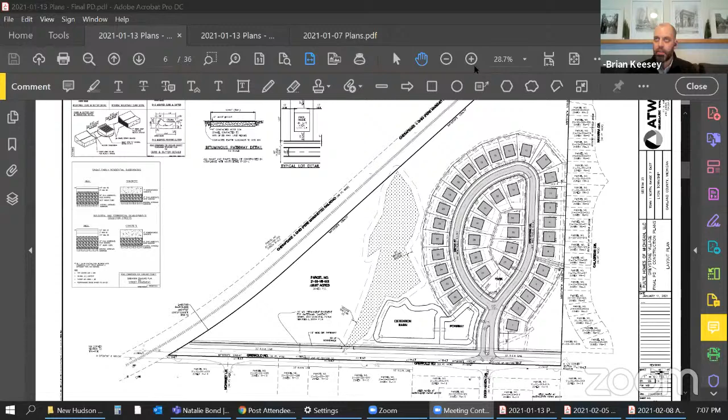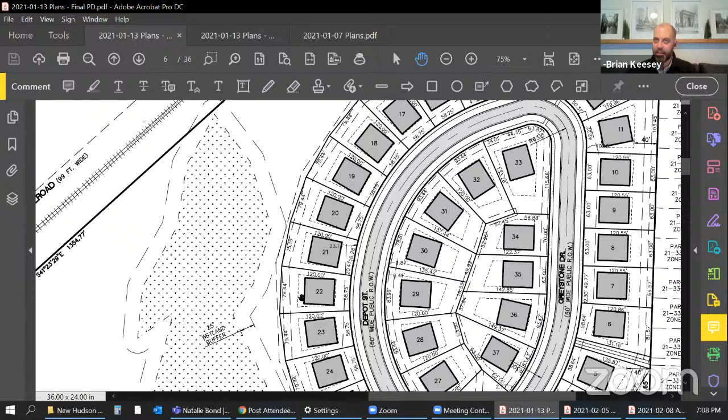Another item requested during the preliminary review was an impact assessment on how decks, patios, or hot tubs would fit within the building envelope. We think that should still be provided. The plans note the building envelope and an anticipated building footprint in concept, but there are instances where an easement is located behind the anticipated footprint, and it's not clear where a resident could or could not build a deck. We think that information should be illustrated, at least in concept, so we don't have unhappy residents who purchase a lot, build a home, and then find out they can't put a deck on the back. That's one thing we think needs to be cleared up.

Final comment from the preliminary phase: there was a contribution agreed upon for $15,000 to the township's 11-mile park fund. We think it's wise to broaden the scope of where that contribution could be applied and instead direct it to the township's overall park fund.

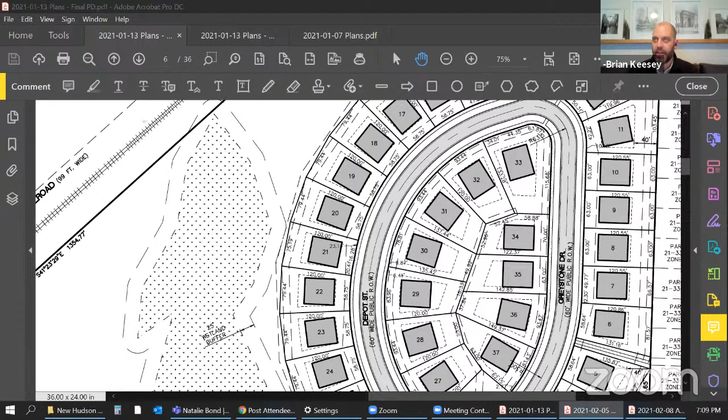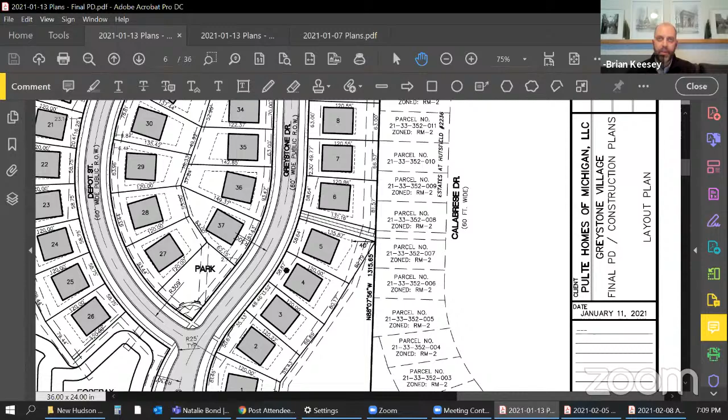In addition to those elements, there are a couple of things I think are important to highlight. There is a stormwater easement in the Estates of Hutsfield, south of Unit 5 and Unit 6 on the Greystone project, and the applicants are proposing a sidewalk there. But because this is a stormwater easement on the other side, it's likely never to be built or constructed as a sidewalk in that area. We feel this portion of the sidewalk in the Greystone project is unnecessary and won't go anywhere, and could be deleted.

The other note in our review is something I've employed in other communities where there's potential for pedestrian and railroad conflict. I have an example in our review letter in terms of a zigzag of fences, if you will.

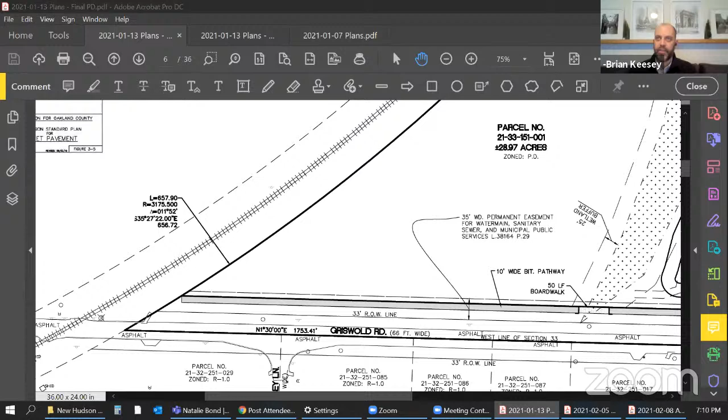I'll put that up on the screen for those who may not remember. Essentially our goal here... sorry, running into a slow computer, I apologize.

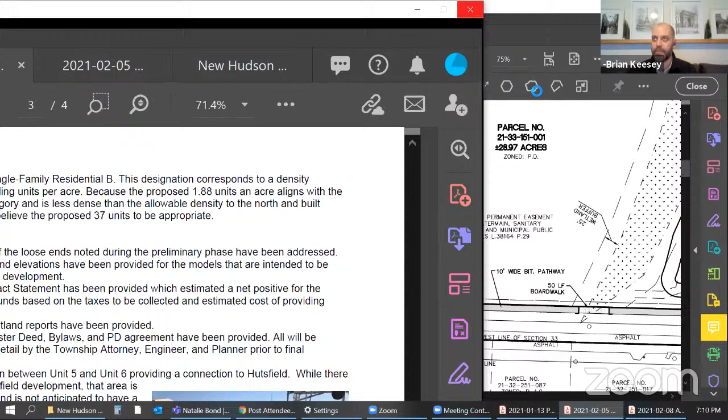Essentially our goal is to signal to pedestrians that they are indeed crossing a railroad track. I know that seems self-evident in some instances, but there have been cases where pedestrians on a bike with earphones on don't hear that a train is coming, and that could potentially lead to a catastrophic event there.

So we think a relatively low cost and easy to install mechanism would be something like this, where a pedestrian is forced to navigate a system of fences to alert them to the railroad crossing. I really apologize, I don't know what's going on with the computer here. I'm going to stop sharing.

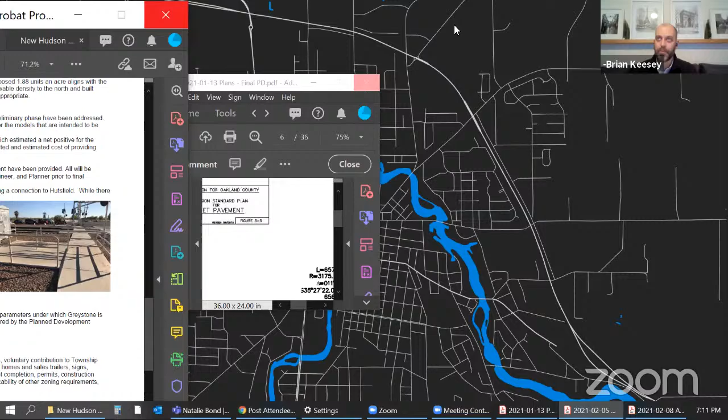In terms of those elements I've discussed, I think the project is in good shape. The plan development agreement Carol has been working on, and Leslie has been working on as well - I owe a few comments, but in terms of all the documentation required by the ordinance, it has been provided in at least draft format, and I think it's in good shape. So based on all that information, there are a couple minor items to clean up, but other than those, we are recommending approval of the final PD.

I'll take any questions anybody might have. The applicants, Brian and Leslie, are here. Any questions for Brian? No, no.

Brian, I have one question on what I'll call the pedestrian speed bump by the railroad tracks - is that something that would be on both the north and south side of the tracks? I think if it's something we're interested in, the township could either build it itself in the future, or we could ask that of another applicant if that comes down the line. It certainly wouldn't be something we'd require as part of this development since it's off-site.

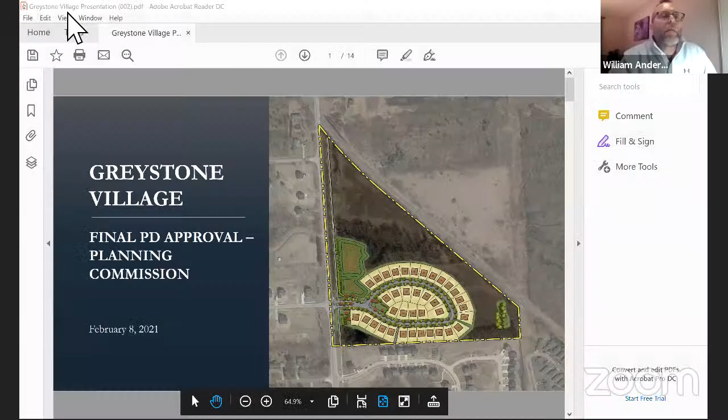Okay, thanks, Bill. Do you have a presentation for us? Yeah, sure. I'll try to be brief, but it's been a while, so I figured I can share the screen. Everybody see that? Yes. Yes.

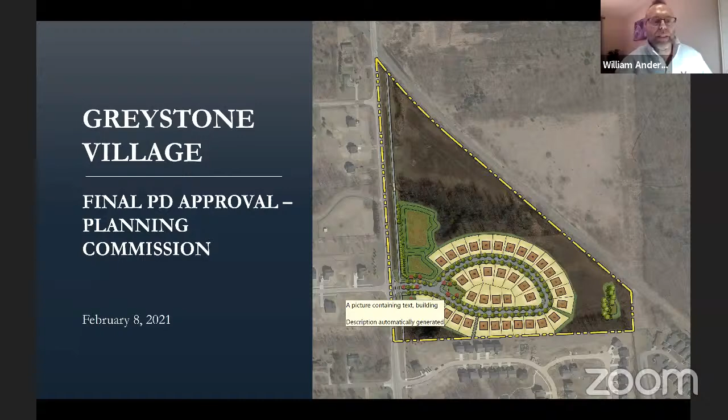Good evening. First, it's been a while. I haven't been to Lyon for a while. It's nice to see everybody, and Happy New Year and all that good stuff. And this project's been around a while. I've been involved now with Pulte at this final PD approval stage. So we're here tonight and glad to see everybody.

So just kind of go through our development team again. Pulte Homes wasn't the original applicant, but they're the land developer and the home builder on the project. So that's going to be our development team.

Just a little bit on the time frame. As I said, this was eligible since it's less than 40 acres. So it got eligible in the fall of '17. And the preliminary PD zoning approval was approved in September of 2018, with 37 single family detached units. It was zoned PD from the original light industrial. As Brian, the planner, said in his letter, very little has changed since then, the plans you see today. And we submitted our final PD plans that you're looking at tonight on January 11th.

So Griswold's a county road, 2-lane road. This is kind of just the area. We're vacant land to the north of us. To the east, we got the railroad tracks, it's Chesapeake & Ohio Railroad, mostly vacant. There's a manufactured housing community to our southeast. To the south is the Estates at Hutsfield, a single family subdivision. And to the west is some single family homes and smaller developments, mostly residential.

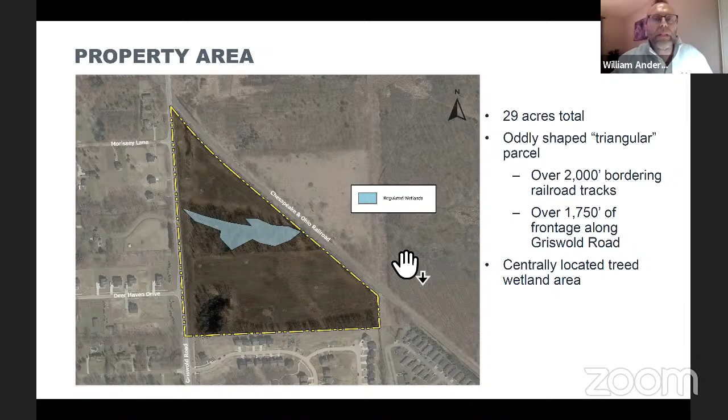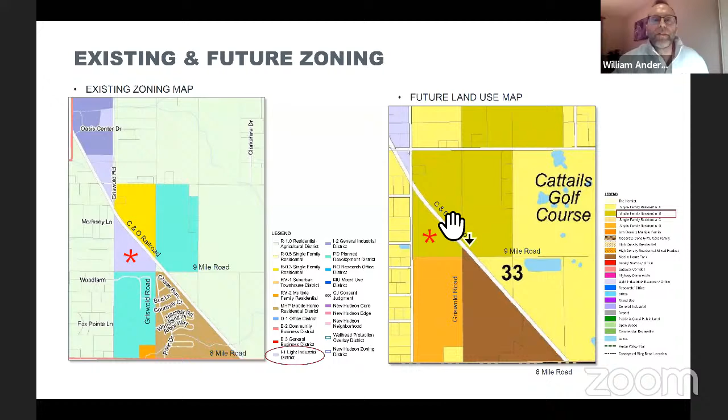That's our property. It was zoned, this is your 2015 map - it still says zoned light industrial, but that's been changed to PD. The future land use map for the township calls this single family residential B, and as Brian indicated, that's densities slightly more than what we're proposing today. So we're certainly in conformance with your future land use plan.

Just a little summary on the project: 29 acres, 37 single family for-sale homes is what we're proposing. Our lot sizes vary because we have a nice curvilinear roadway with nice boulevard entries, but it's about 63 by 120 feet deep minimum, with a nice landscaped boulevard entry and curvilinear road coming around.

We have a little park open space - when you come into the development, you'll see an internal park. We have over 51% open space on this development, that's over 12.7 acres of upland, plus the 2.2 acres of wetlands. So a substantial amount of open space on this project.

As far as pedestrian infrastructure, these will be public roads with sidewalks on both sides throughout the residential community. We're connecting the development to the east - not west, I apologize - we're proposing a sidewalk connection there, I'll talk more about that in a minute. And on Griswold, we're proposing a 10-foot asphalt pathway that'll connect to the existing path to the south and head up to the north end of the railroad tracks at the north end of our project.

So significant amount of tracks - just to speak to that a little bit, your planner indicated there's a sidewalk proposed to the south side. We concur that we should eliminate that sidewalk, it doesn't really interconnect. There's nice pedestrian pathways along Griswold, so we concur with your planner, and future revisions of our plan would eliminate that little stub to the south.

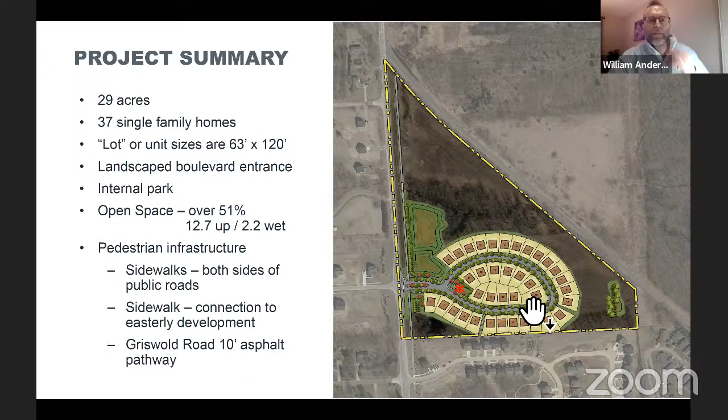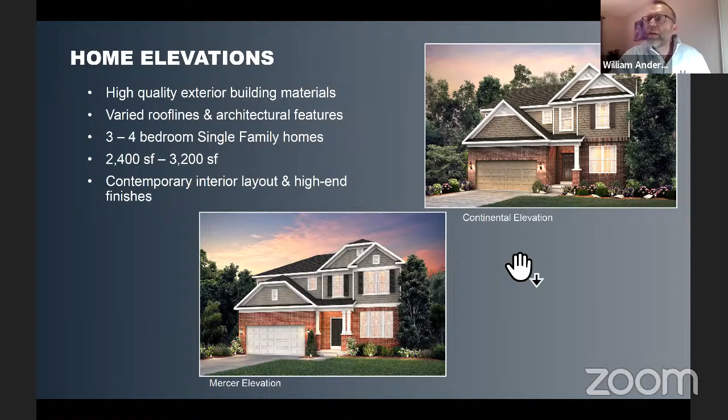As far as the home elevations, they were included in the plans, but we got some high quality exterior building materials, a lot of nice roof lines. These are 3 to 4 bedroom single family homes. Our square footages are in the 2,400 to 3,200 square foot range, with nice contemporary layout and high end finishes. Again, really nice looking product.

Just a little bit about the rear yard exhibit - I know there was a lot of talk about that originally. This is a little exhibit, I have a blow-up. You'll see the blue area - every lot has the capability for a deck to be in the rear yard. But as typical on lots, I'll show you a little blow-up area.

Our lots are 120 feet deep, so what that creates is a building envelope on every lot where you can put a 65 foot deep home. I've got a 25 foot front, a 30 foot rear setback - that allows you to build your home in a 65 foot envelope. The 30 feet in the rear generally has a 20 foot easement in the back, shared across the property line, so that allows about 20 feet into that rear setback. There's plenty of space - our deepest home product is 60 feet, so that's 5 feet inside the building envelope.

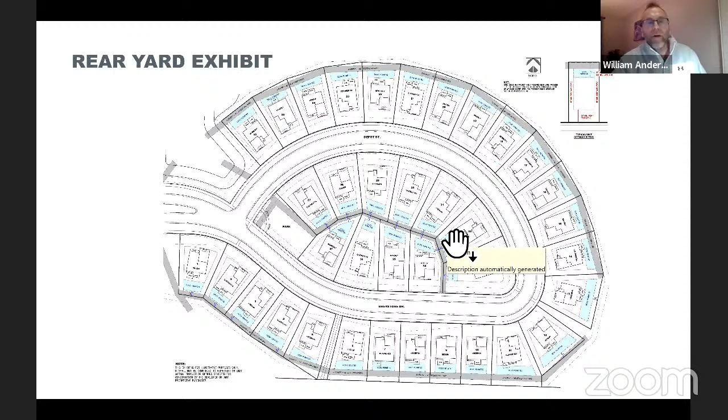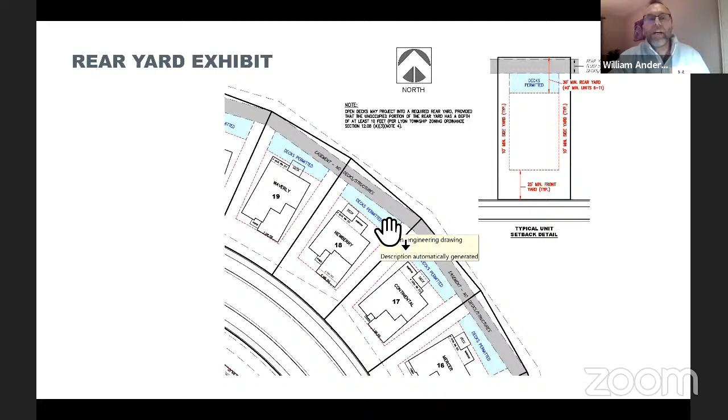Plus I have about 15 to 20 feet for extra deck area into the rear yards outside of easements. When you do residential development, you always have rear yard drainage, so you always have a storm easement area there. The 120-foot deep lot configuration allows a very generous housing product and deck construction on every lot. When Pulte goes in for every building envelope, they lay the house out, do a lot fit, and show where the deck goes along with all the easements, showing that it conforms with the geometry of the lot. All these lots can have an ample deck provided just because of the lot size with this development.

Just a little bit on the Griswold pedestrian crossing on the left here. We're going to propose that we work with the road commission—that's their road—but basically it's going to involve a couple of signs, a warning sign about a crossing ahead, a nice big crossing over to Deer Haven, and signage on each side. So that would be the crossing proposed on Griswold, and we're pleased to do that improvement.

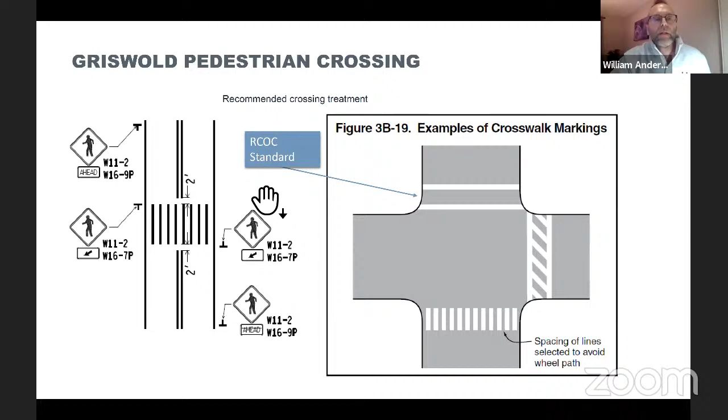As far as public benefits associated with this PD, there's a contribution to the 11-mile park fund, and the addition of the crosswalk on Griswold to Deer Haven Drive, the development across the street from us. Most important and meaningful, we have over 12.4 acres of permanent open space as part of this development. We're pretty excited about the open space development of this site. We also have almost 5 acres of land which will be right-of-way, granted to the road commission as part of this development. So pretty significant land contributions as part of this project.

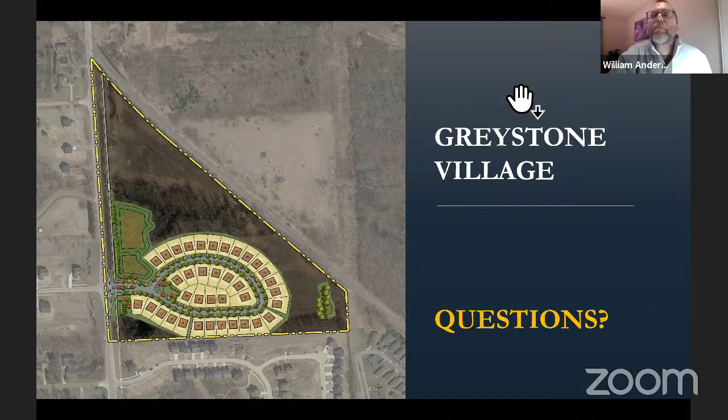That's what I have, folks. I'm around for questions, as is Joe Score, Vice President at Pulte. Okay, thank you, Bill. Any questions for Bill?

Patricia asked: what kind of plantings are you suggesting down by that railroad? Bill responded: like an arborvitae—I wouldn't want to do a big tree because eventually you'd want to move it, since right now there's no transportation to the north, right, it's basically a dead end. So I would just put a pathway end sign in the middle and put a couple of plantings just to demarcate the end of the north end of the pathway.

I know what Brian said—I'd seen that in downtown Kalamazoo, it's kind of an urban switchback thing. The problem is that's truly just for walking, it's cumbersome with bikes. So I would like to just do something as simple as that, Patty, at this time. I have to think about that.

Mr. Conflitti asked the applicant what price range they're looking at for these homes. Joe Score with Pulte Homes of Michigan answered: our base prices will start in the threes, and we expect the fully delivered price with options, premiums, and upgrades to be somewhere between $425 and $450, which is very similar to what we're selling at the Estates of Huddersfield. A commenter added that they like the elevations, saying they're good looking, and noted again it's a very tough piece of property.

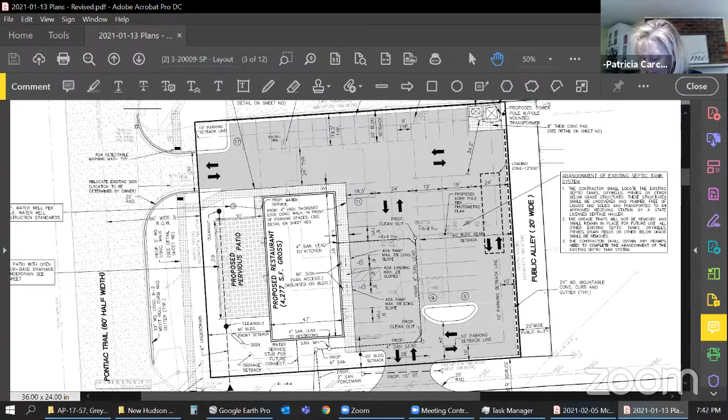The next plan up for consideration is the replacement for Lion Cantina. Obviously, there was a bit of a catastrophic event there a couple of years ago, and so the replacement structure and parking infrastructure is going to be modernized as part of this project.

The plan is to construct a 4,277 square foot building on the 0.73 acre site. It will be used for a restaurant. There's adequate parking, and there's a pervious pavement patio out in front that complies with our ordinance as well. So it'll be a nice fit for that site.

In terms of ownership information, we have all of the required documentation. We think that the building setbacks are appropriate, and we do note—this is our largest note for you on this plan—that the parking along the north property line is within the 10-foot setback. We just dealt with this on the Culvers project along Pontiac Trail as well.

This is really the only way that parking fits on this site. I know Mr. Emerine is here this evening on behalf of the owner and can speak to this, but it has been investigated to death in terms of alternative solutions. We talked about potentially parallel parking here, which would then cause a parking shortage on the site. I think this is a good solution on a tight site, so we're generally supportive of this variance request. Obviously, we'll have to go to the ZBA, and the ZBA will evaluate it based on their criteria. But it's something that we're willing to support from a planning and zoning perspective.

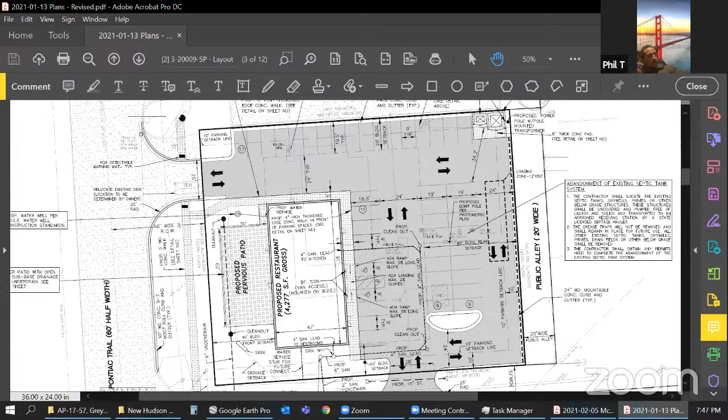The sidewalk is going to be installed along Pontiac Trail. If you're familiar with the site today, the existing parking lot extends into the right of way, so there's really not space for a sidewalk. Anybody navigating it as a pedestrian would be walking through the parking lot. This is a vast improvement. There is a 5 foot parking, 5 foot walkway in front of the site that will end at Lillian Street and connect to the existing sidewalk to the south.

In conclusion, our only comment relates to the parking on the north side, which will require a variance for the setback. Other than that, we defer to the other consultants in terms of items that need to be cleaned up, but we find that this is compliant and recommend approval of the site plan.

Thank you. Any questions for Brian?

Mr. Chairman, I have a couple here. Brian, in your letter, I believe I read composite wood for a dumpster enclosure. Should that not be a gate? Should it not be composite material? I mean, we did have one issue. I just want the applicant to realize and understand what our expectations are, number one. The other question that I had, and I should know this, I've eaten there enough, what about neighbors to the east?

We talked at length when Culver's went in. How close is it to the neighbors? Do we need a wall back there? Which I don't think there's one currently there, if I'm not mistaken. Just have some questions about that.

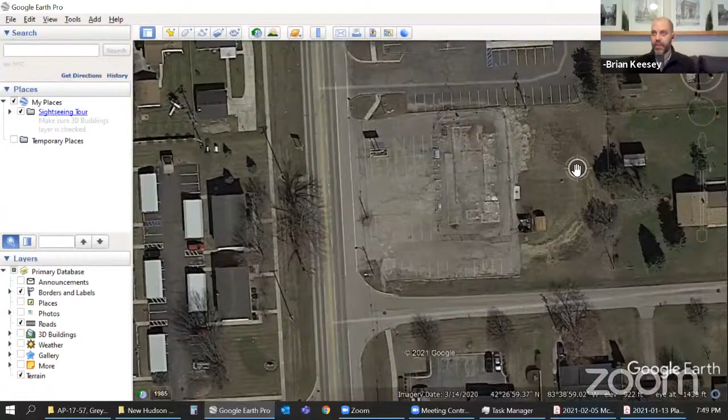There is not a wall there today. I'm going to drop the aerial in. What's interesting about this site is there's a 20-foot public alley back on the east side separating the parking lot from the residences. Looking back at the earlier photo, you can see the remains of the previous restaurant, which was a lot closer to the existing house than the new building is proposed. The new building is taking advantage of our 40-foot front setback, so it's actually getting pushed away from the residential properties and towards Pontiac Trail.

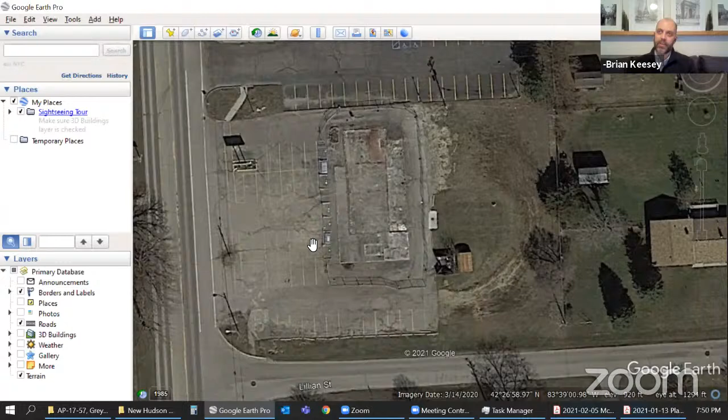All right, well, I was just concerned about noise and headlights as we get into the winter months, and I'm sure hours of operation are going to dictate that. Just wanted to be sure that doesn't become a nuisance.

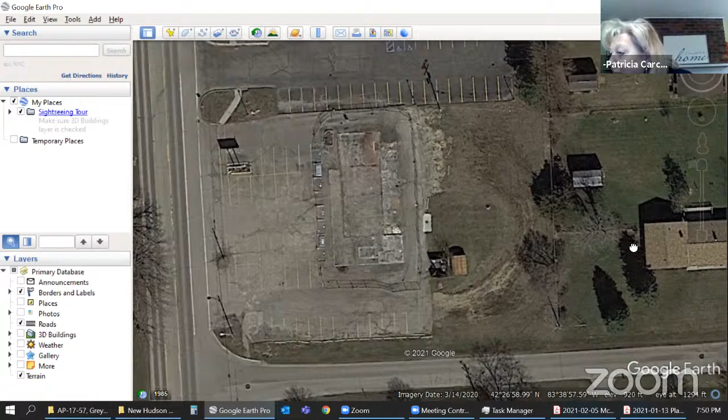It looks like their garage... their house, I can't see how their house is facing. I see that now, Patty, yeah. You see that? So I think this is their garage, but I get it. I thought the same thing. I pulled it up on my Google Earth to see it. I can't figure out where, it faces the front. Okay, nice house, looks like they've got some extremely large and developed evergreens, so that'll help. And it looks like a shed in the back.

Oh, that's excellent, Brian. Thank you. Yeah, that really is. Wow.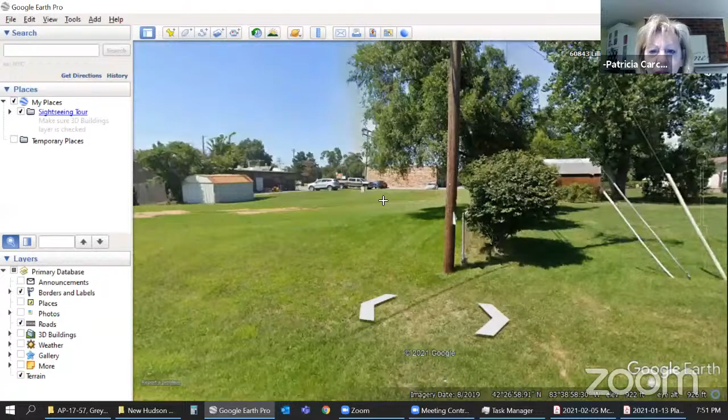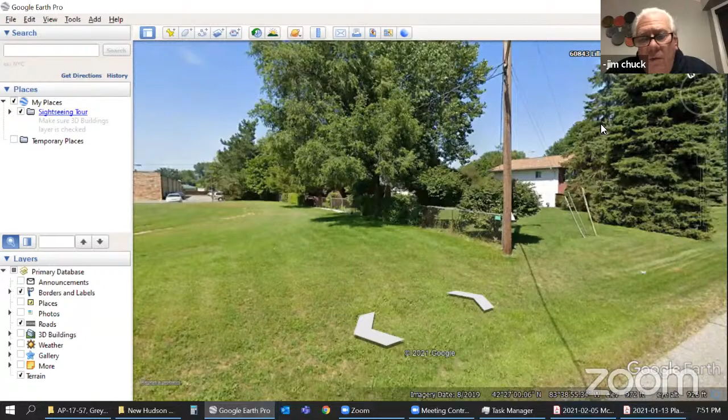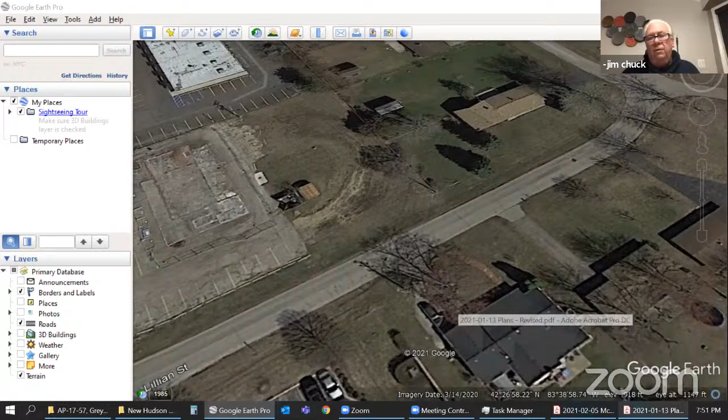That's my only concern. I guess if the homeowner is tuned into what's going on, they would probably confront us or talk to us. But I just wanted to be sure that it would be okay. It's only one person, but we don't need to get anybody upset over a new building. Very good, that's all I have.

Right. Thank you, Mr. Chuck.

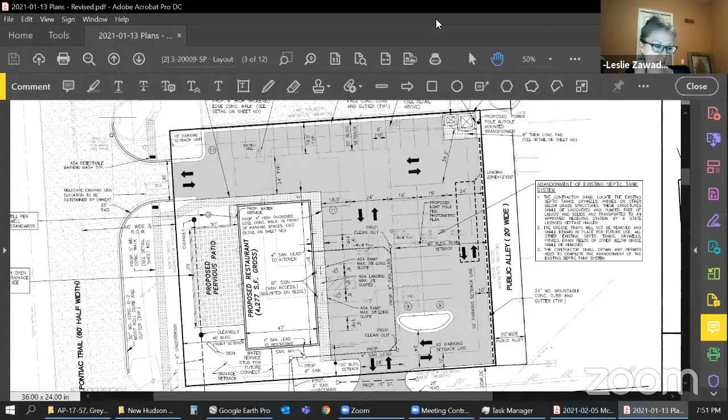Leslie: Thank you. I'd like to refer to our February 4th review letter. We note on the site plan that currently the Lyon Township water main is not available to the property at this time. The applicant has left a stub for future water service, and we recommended the reuse of the well. However, I wanted to let the Planning Commission know we are currently designing a water main that would service this parcel. It will really come down to timing of the applicant's project on whether or not they tie into the water main, but we would certainly encourage it, and we'll work with them as they move through the process to see if we can meet their time frame.

Regarding the landscape plan, the existing township sanitary sewer manhole in Pontiac Trail should be shown and labeled, as well as the location of the ADA spaces on the plan should be consistent throughout the plan set, so that requires a minor modification. I'd also like to note that a detailed engineering review is required should the Planning Commission approve the project, as well as capital charges for the sewer will need to be analyzed prior to a pre-construction meeting.

This parcel did participate in the Southwest Sewer SAD. They did pre-purchase some capital charges. We would just have to analyze if it would cover the amount of seats proposed in the new building. So we wanted to note those items that were not in our letter, about the capital charges, so they're part of the record. But overall, we don't have any serious concerns with the project, and we recommend approval of the site plan as noted.

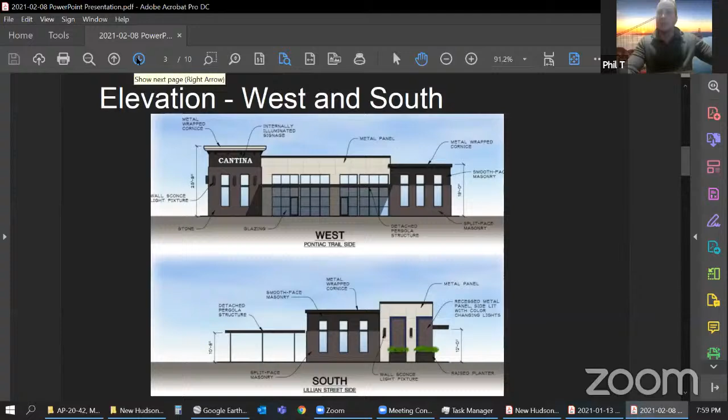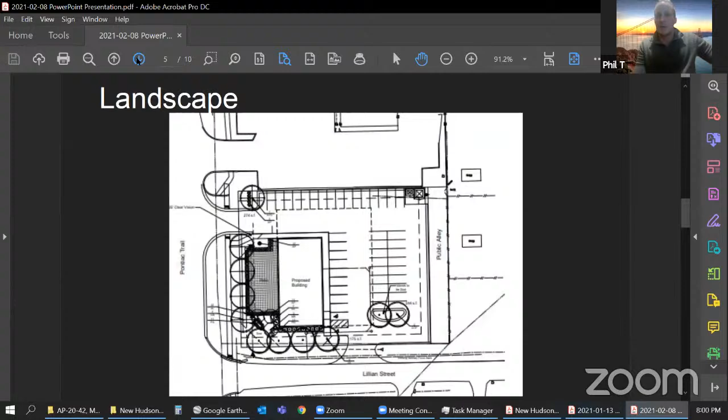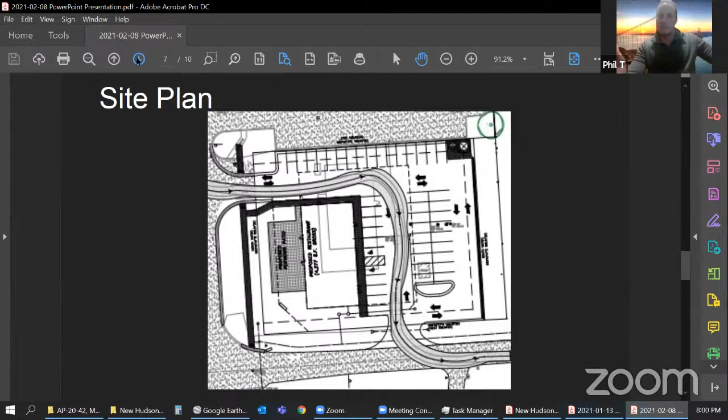There we go. Thank you. And then the proposed top view here, with the parking and the building envelope area there. Site plan view. And another site plan view here.

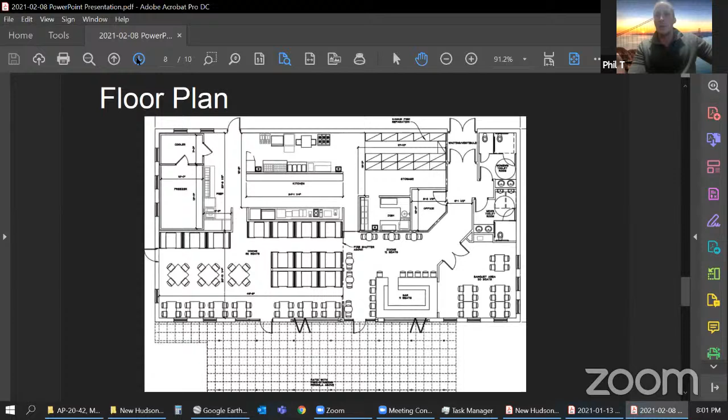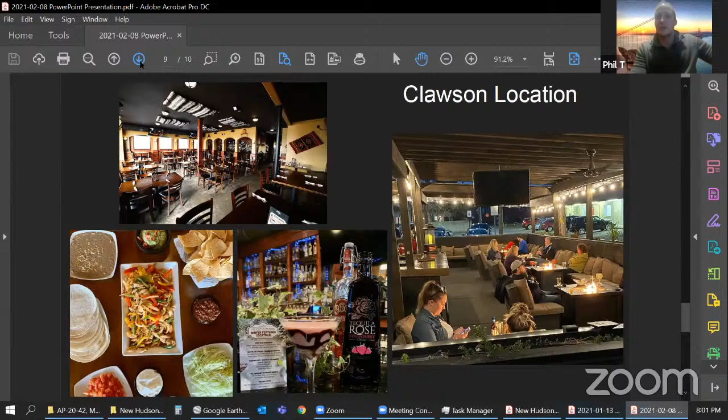Let's see here. Here's some existing pictures of our other 2 locations that we have, and some of our food and bar areas, outdoor dining. This is our Clawson location here. And then that's our White Lake location that just opened up last year as well. Some pictures of our food, our bar. Bottom left-hand corner is a picture of our banquet room.

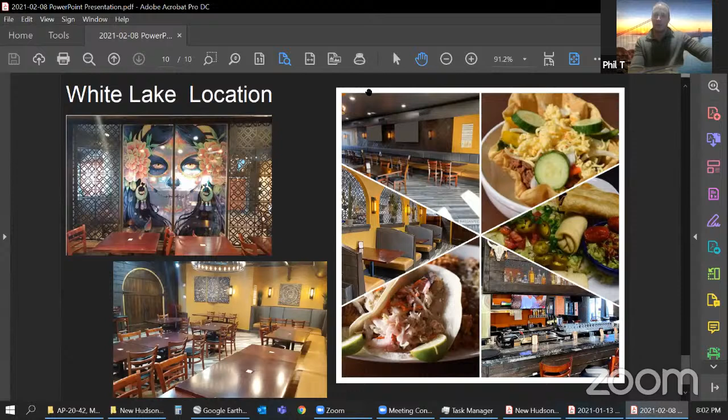And we'll go to the next screen here. That's all I've got, Phil, are those... Yeah, 10, that's it. Yeah, pages. I appreciate it. Thank you for doing that. Sorry, I'm trying to do this through my phone. I wasn't able to get in front of my computer at this time, but yeah, that's it.

I think Lyon Township's a great community. I think the Lyon Cantina that was there before - I think people like a Mexican concept, so we decided to bring Mojave Cantina out there. If you guys would love to have us come out there, we would love to be there. So I'll hand it over to you guys with any questions.

Great, thanks, Phil. And before we jump in, if it's all right, Mike - please. My name is Jason Emerine, I'm with Seiber Keast Engineering. Address is 100 Main Center, Suite 10, Northville, Michigan, 48167. I'd just like to address a couple of the concerns that were brought up during the presentation, if I may.

As Brian mentioned early on, the challenge with this site is meeting the new ordinances on a site that was legal non-conforming before. Brian mentioned that there was a number of parking spaces up inside the Pontiac Trail Road right of way. The sidewalk cut through the parking lot.

The objective that Phil gave to me early on in this project was, hey, I want to rebuild this restaurant. The previous restaurant was 4,483 square feet, and Phil wanted to rebuild the exact same square footage. The plan that we brought to you guys in, I think it was November, submitted before the December Planning Commission meeting, met that same building square footage that Phil had asked for. Initially it was 4,483 square feet. That included some parallel parking along the northern property line.